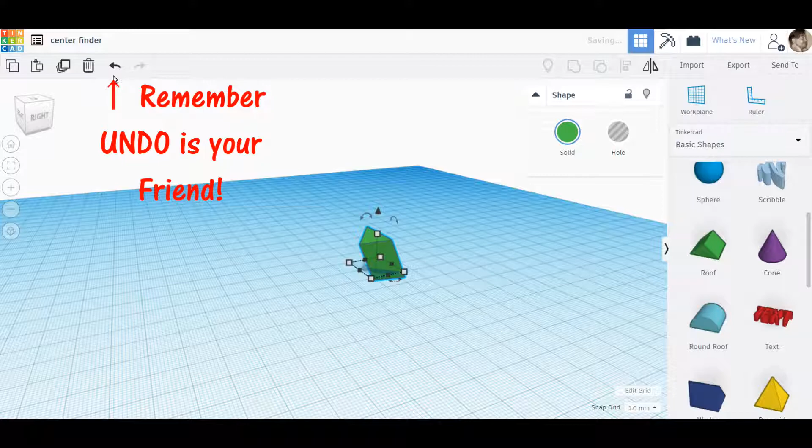Okay, in this video I am making a 3D printed center finder. Well, two in fact, but one's just a copy of the other. I'm showing you this basically because it's all 3D printed, there's nothing much to show, but there's a bit of video footage at the end of the printing process.

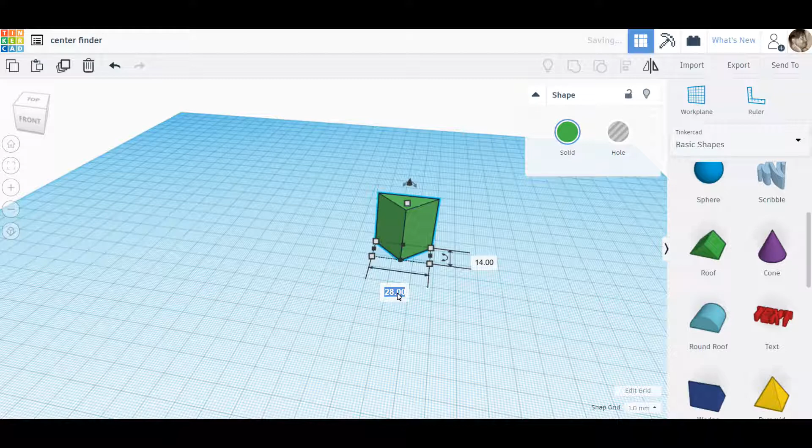I'm just showing you the quick design work that I did, nothing fantastic. I did it in Tinkercad. I have got Fusion 360, but I'm still very, very green with that at the moment.

And it's very much a case of time. So basically, I started off with two triangles, one to cut a hole in the other, and then made a ruler and joined them together. That's the long and short of it.

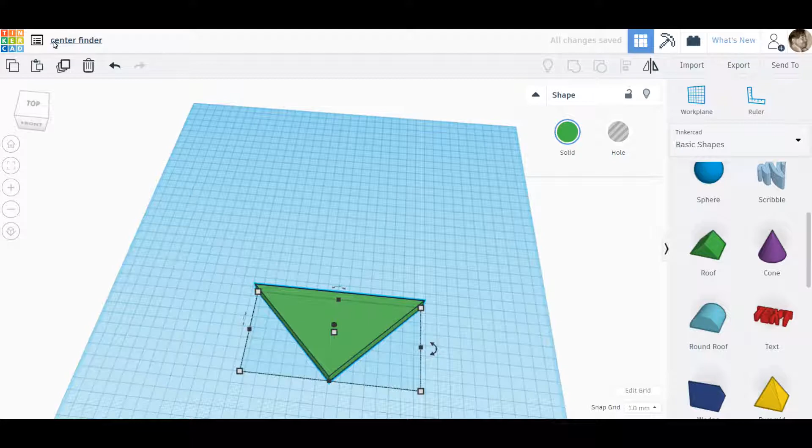And it is dead on accurate - as accurate as your 3D printer is anyway. I was really pleased with it, and the reason I did this was because...

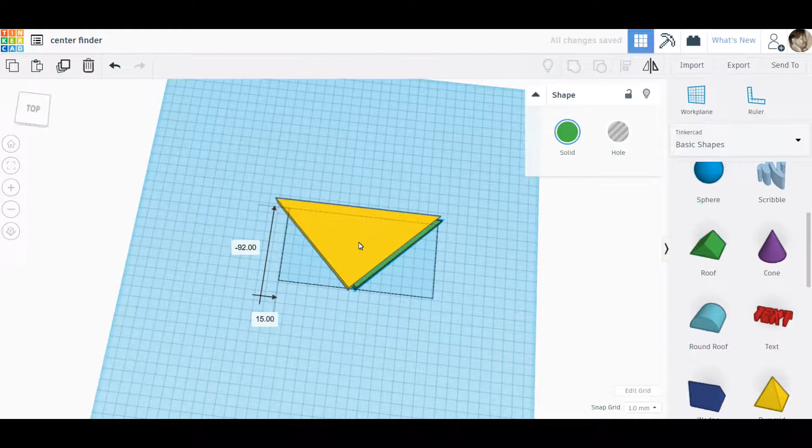I needed to find the centre of a circle basically, and I hadn't got a centre finder at the time. Lo and behold, the day that the print finished, I went to an auction and picked up a complete set of centre, squares and angle finder, made by Moore and Wright, which is a nice bit of gear.

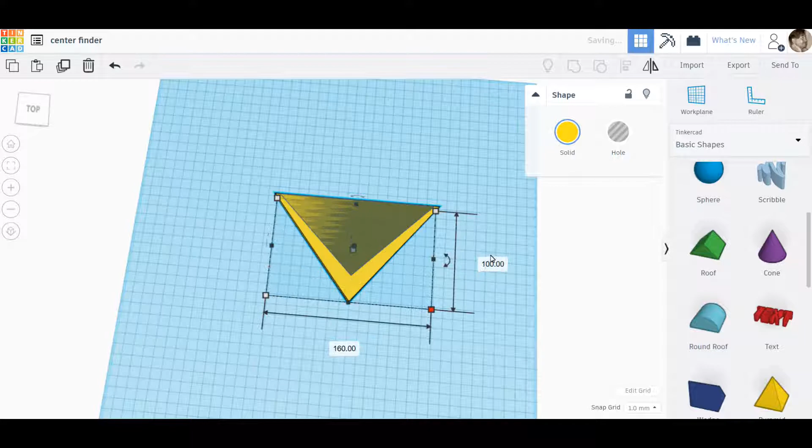But anyway, back to this. So basically, as you can see, I've two triangles, one in the other, one set to hole function, so it'll hollow it out.

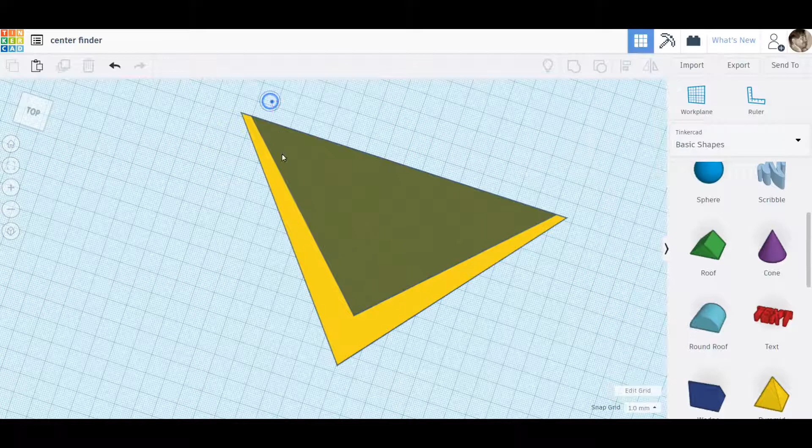And basically I'm just twisting it around, just making sure I'm happy with what it looks like. Going to join them together and it should hollow it out. There we are. So that gives you the first part.

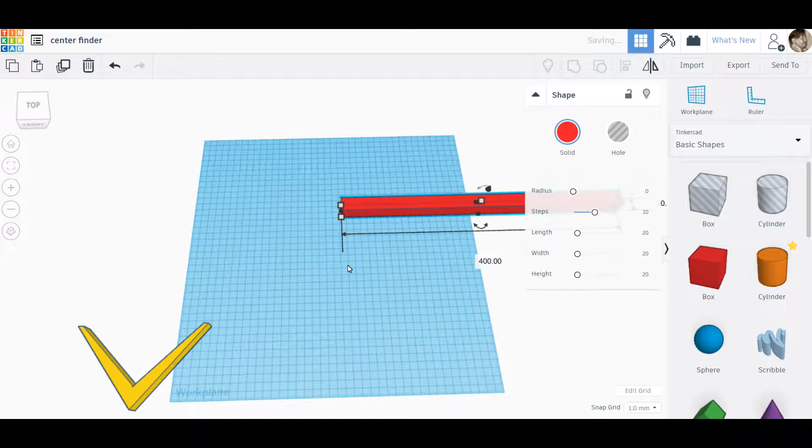So the next bit is the ruler. So start with just a square, lengthen it - I shouldn't have lengthened it the other way - widen it, and flatten it, of course.

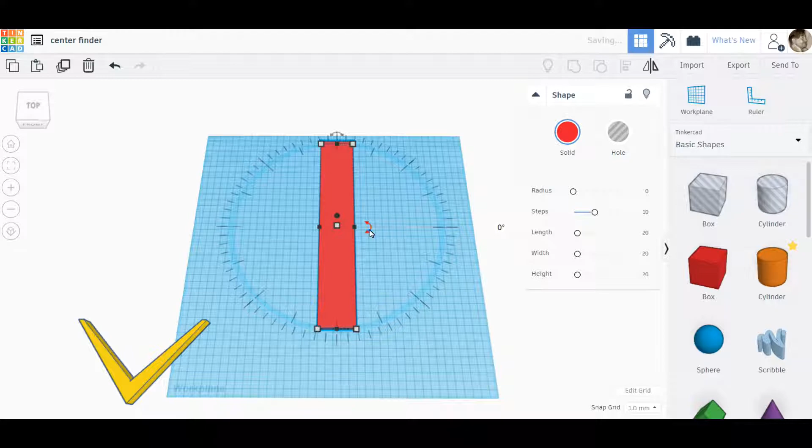I do this twice because I actually put a second one on the taper, as you'll see in a minute. Now in Fusion 360 you could probably round off the upper edges slightly, far easier than you could in Tinkercad.

At one point I did actually put a taper on one edge, but the way that it wanted to be printed, it wasn't really going to make a nice edge, you know, it was better just to leave it square.

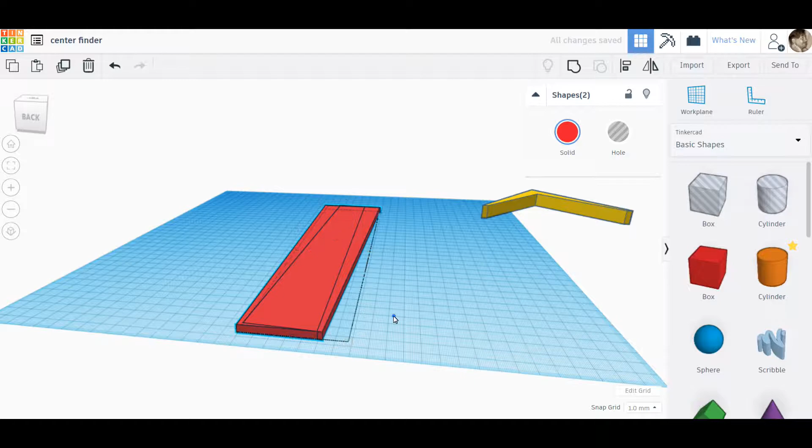So as you can see, the second one I've just slightly angled and I'm just moving it around so there's very little unevenness at the far end where the two overlap. It's just a very slight kink on the corner, which is fine.

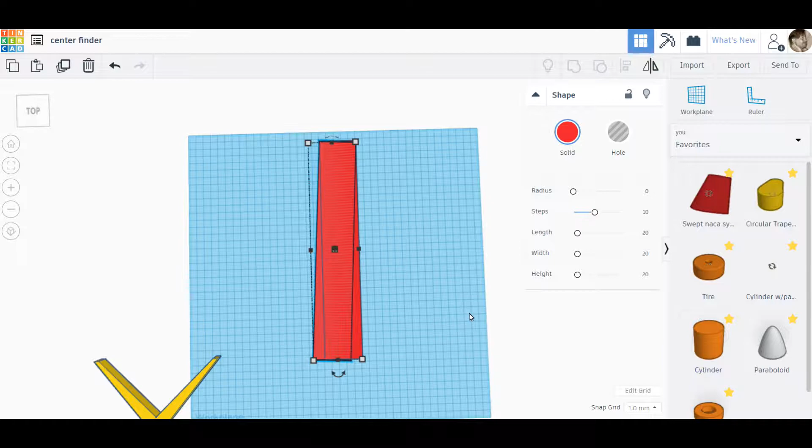Not worried about the bottom end because that's all going to get chopped off anyway. So what I'm going to do now is round off one edge, the edge to the tapered side. You'll see how I do it.

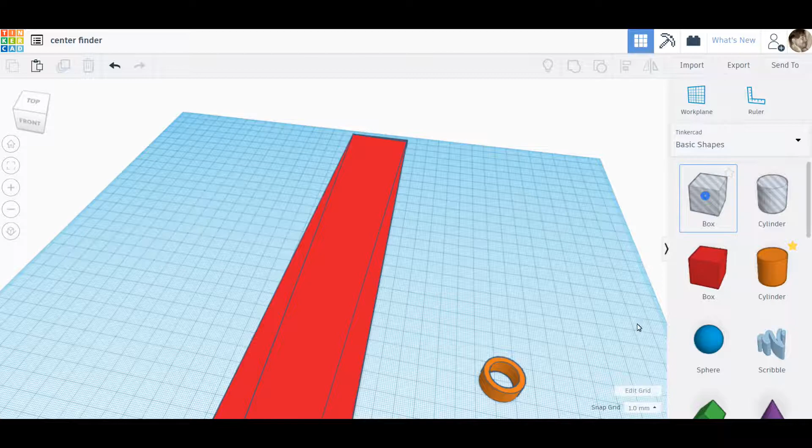What I should have done though is made this a bit thicker - you'll see why later on. But to give me a rounding profile, I'm just going to basically slice it so I've only got a quarter of it left.

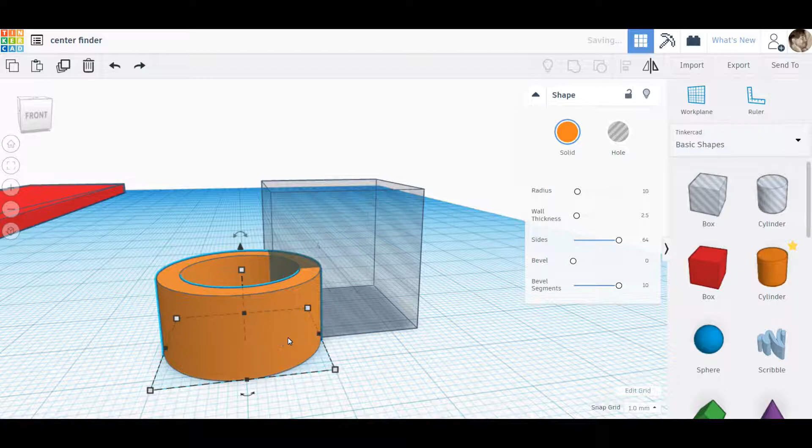One thing to do, remember to increase your number of segments on your circles, which makes them far smoother, as you see there. So I'm squaring it up so I've got a defined measurement there. Makes life a lot easier when you want to divide it in half. I know it's 20 wide, so 2 boxes.

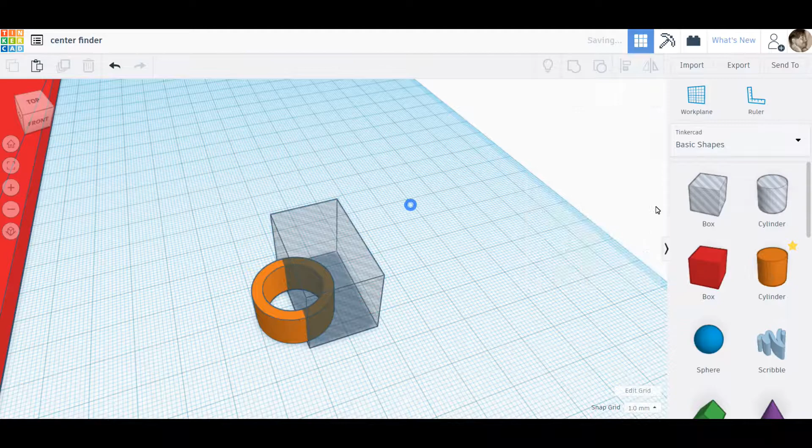So that's half done. Second box, and again I'm just going to move the circle up to give me a nice easy point of reference. There we go, that's that. Join them together - that gives me just a quarter of a circle.

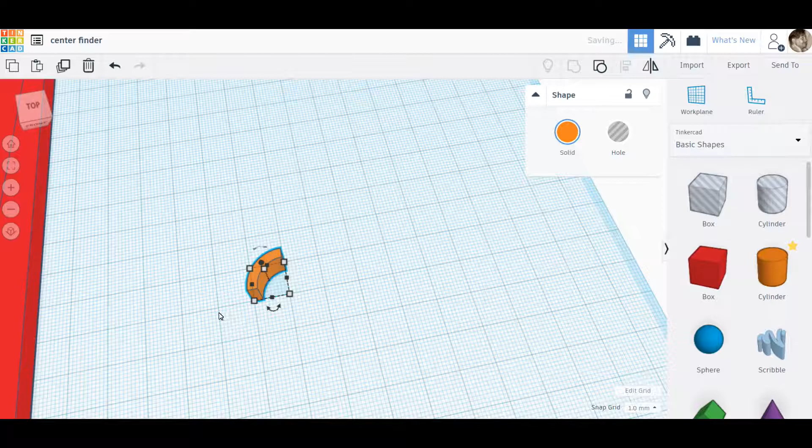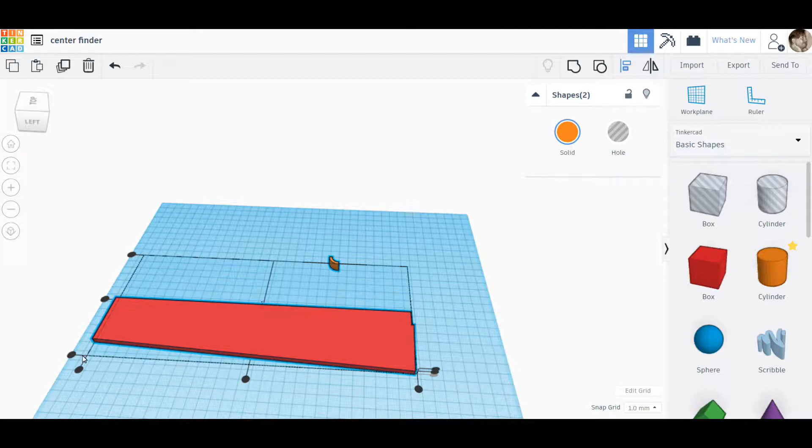So, right, just bringing this up - to be fair, I don't quite know why I did this. Let's zoom in a bit, and you can see that just slight on that edge, there's a slight kink upwards where the angle profile takes over.

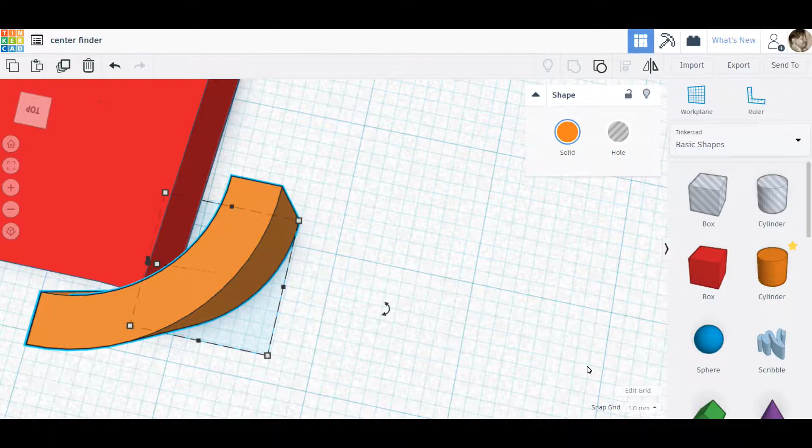So it's just a matter of just putting this in, and then what I'm going to do is use the hole function, and that's why I should have made it a bit thicker, because it would have covered that profile, but it's easily got round.

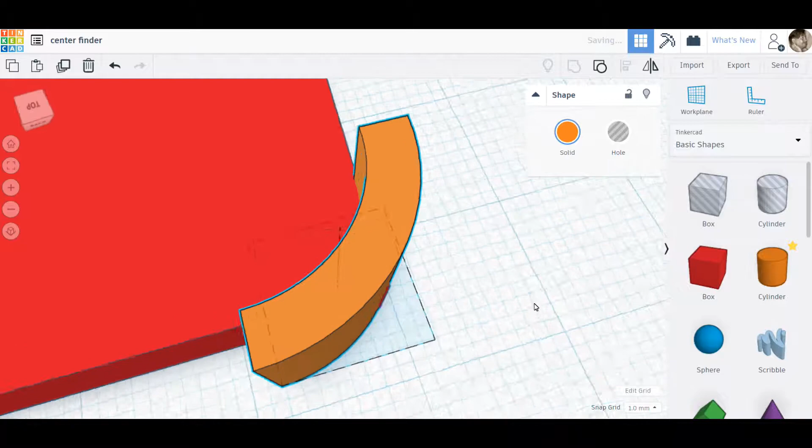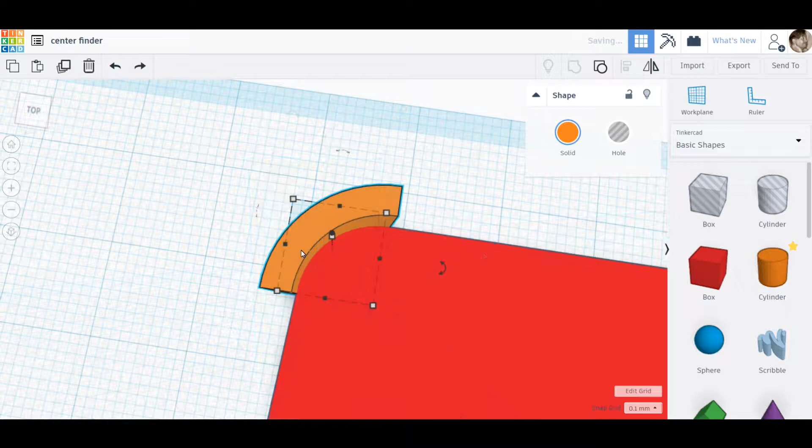So basically I'm just trying to move these into a nice tight position, and I'll show you a better example in a second, because I zoom in so you can see on the edges - you can just see a little line on the edge. There we are, you can just see the line.

I just want there to be just a little bit of it left, so that's a bit tight. There we are. So we want just a little bit of line, and that should smooth in nicely when you do that.

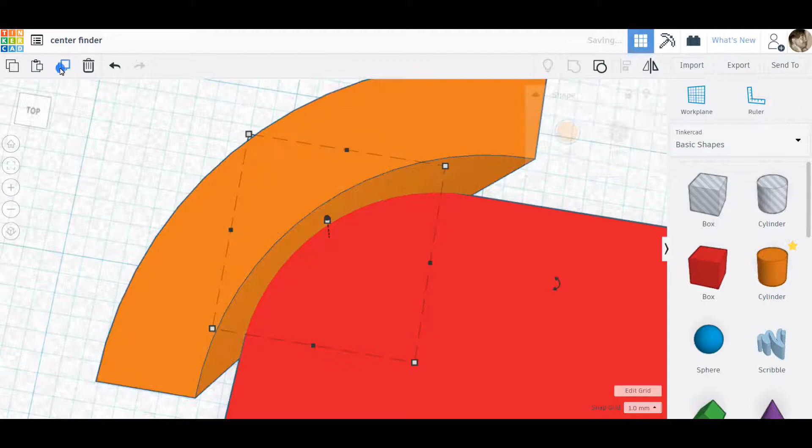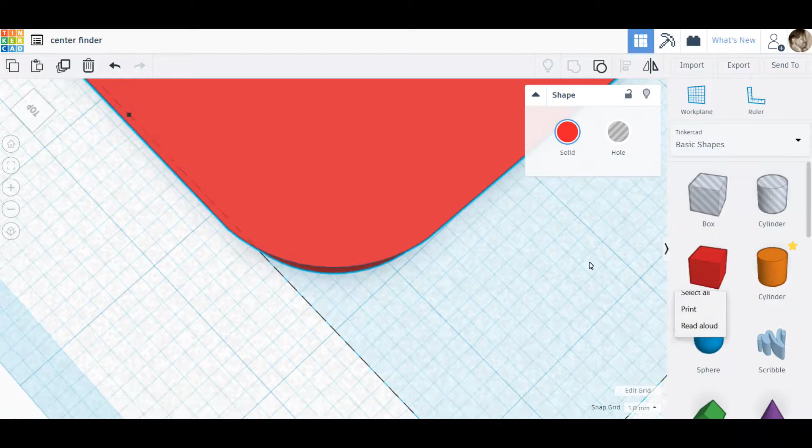Now I've just duplicated that, just moving it out to cover that extra corner that's poking out the back. Put on hole function, join it all together. Bob's your uncle - nice smooth corner just taking off. So really not a lot to it.

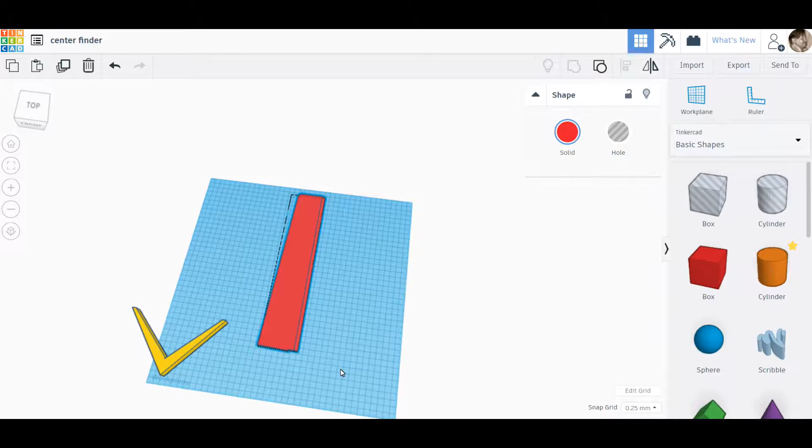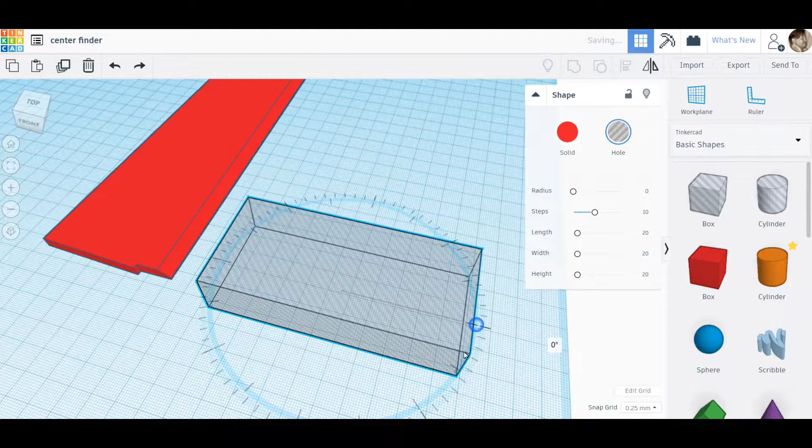So, nice big box to cover it. Put my angle at about 45, drag it over. Don't need to go right to the corner, because I can tuck it into the triangle, there's enough meat there. I'll join the two together when I'm ready.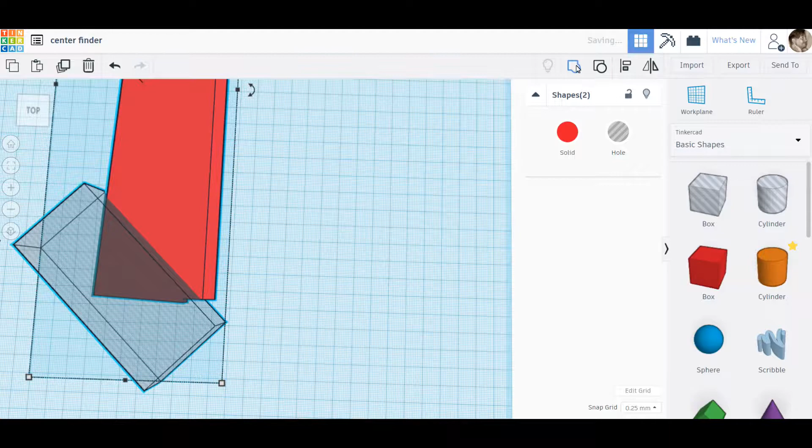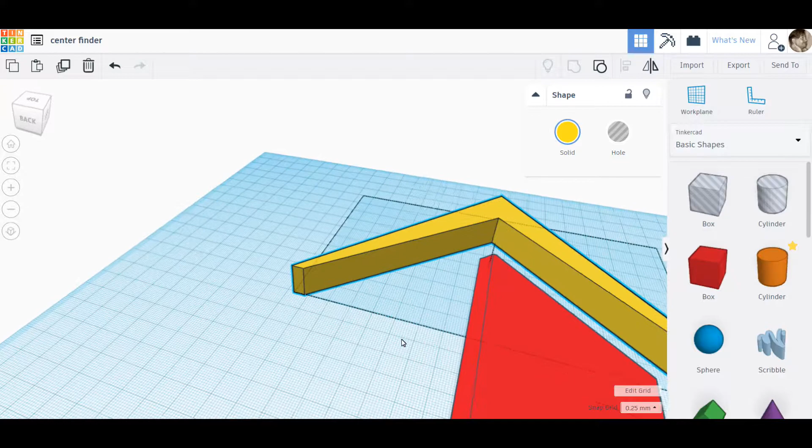Right, let's lop that off. Now drag that over. You could center it with a ruler, but it's easy enough to do by eye. Remember, all the adjustments at the moment are set to millimeter, so you can easily gauge whether you're in or out by a millimeter just by looking.

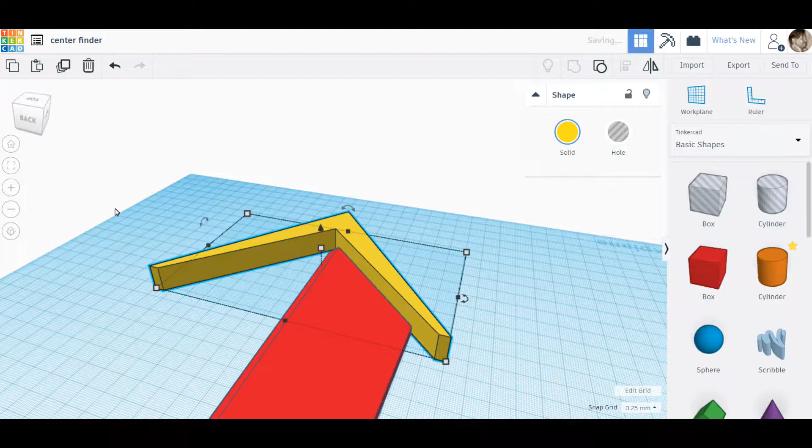So just lining it up. I keep clicking on my center view, which is the second button down on the left there. It will center on the object you're clicked on. If you're not clicked on an object, it will center on the whole mass. So there, just lining that up with that edge.

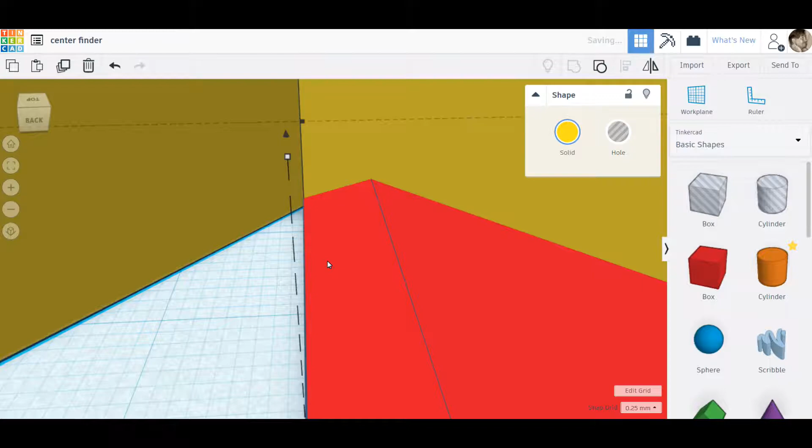Just spin round, make sure you're on there. Because you're set to 1mm segments, you pretty much can do that by eye. If it was any less than that, you'd start to worry whether you were dead on, but with 1mm you should be able to get it nice and easy.

And there we are, that's the basic shape of it. It's all looking nice.

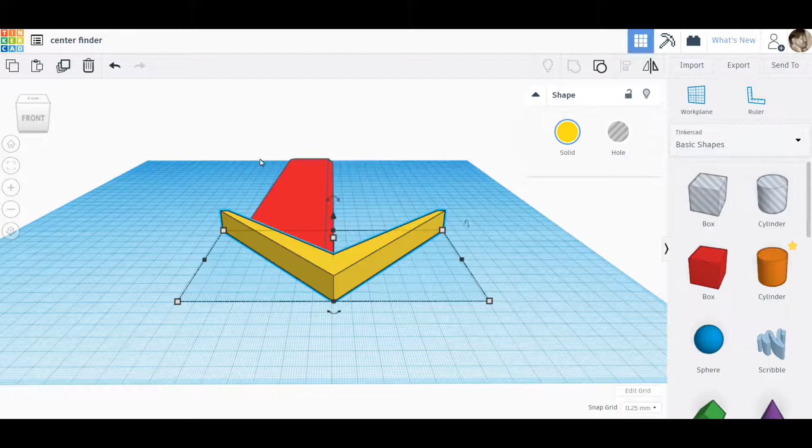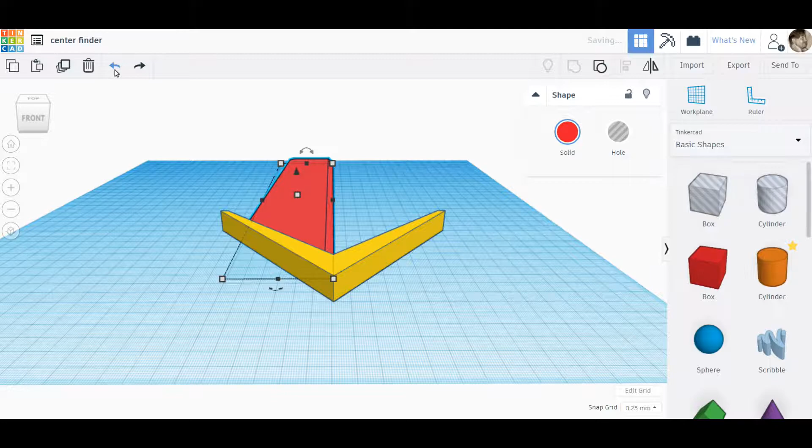Don't know what I'm prattling around with there. Don't quite know what I'm doing actually.

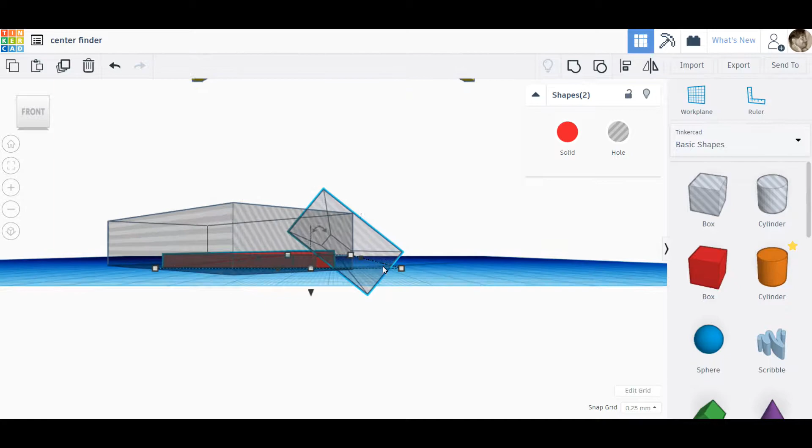Oh, that's right, it's because I'd put a tapered edge on and I wasn't happy with that tapered edge. Because when I come to 3D print it, it could cause a problem. And realistically, as much as it will print okay, it's not worth the aggro, because it's not going to cause a problem being dead square.

So I basically just deleted it in the end. I just wasn't happy with it. Still just can't make up my mind what I'm doing, but I know in the end that's it. I just decided to delete it, keep it square.

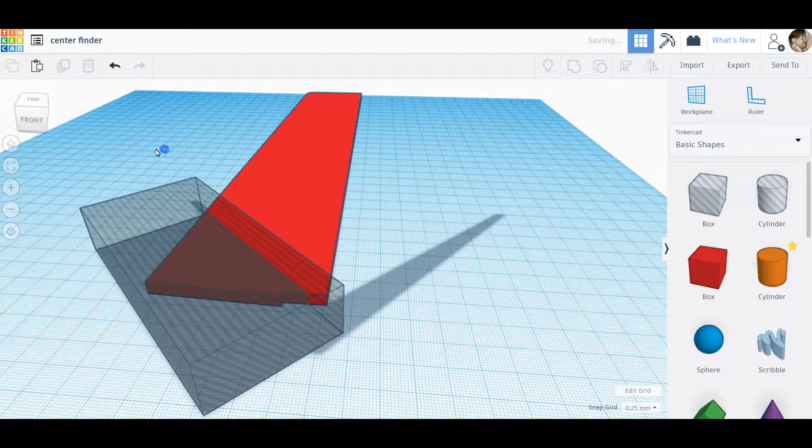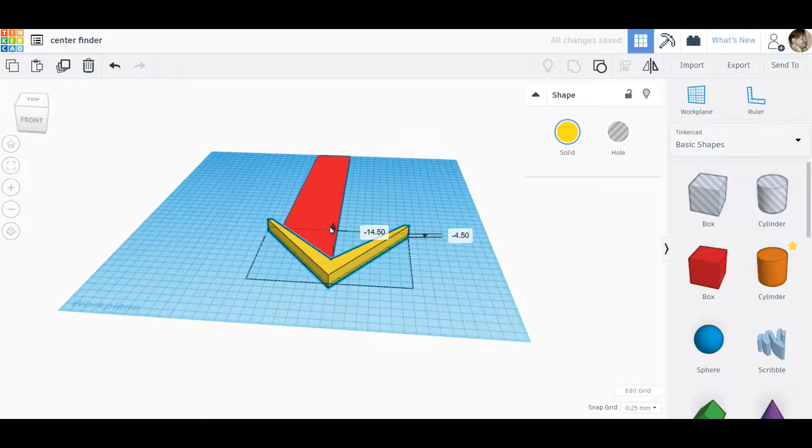It's easy enough, when you're doing something like that, to just shift something up in the air out of the way to save realigning things. I've spoken to a few people and they have this habit of just dragging them off to one side.

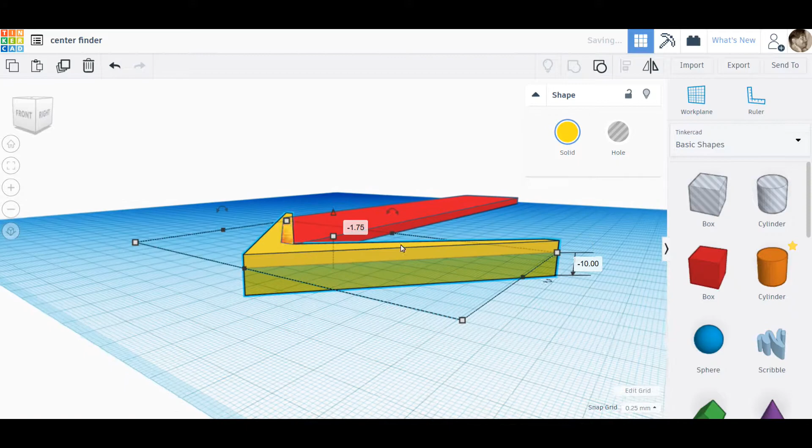Now I just need to get this level. Now, strangely enough, if you wanted a left or right hand version of these, it'd be very easy to take my design and just flip the ruler over to the other side.

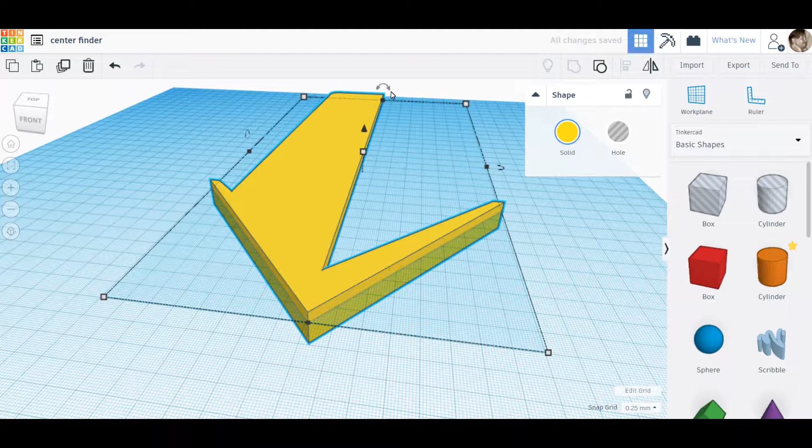So, for instance, this is designed for right-handed use, because it would be used just as it is now. But equally, if you wanted a left-handed version, so you'd be scribing with your left hand, you could easily just take the two parts apart and drop the triangle down on the other side.

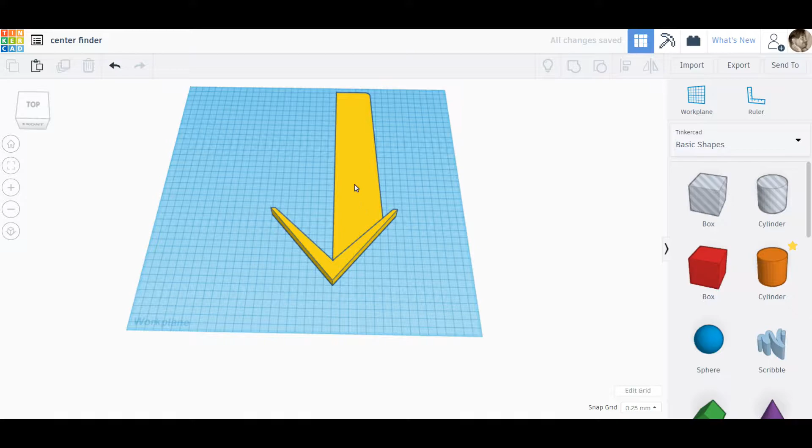And you could make a left-handed one. I mean, you could put the triangle part in the middle, so you could use it either way, but it would make it a bitch to print because you've got no long flat surface. At the moment, it's easy to print on the bed.

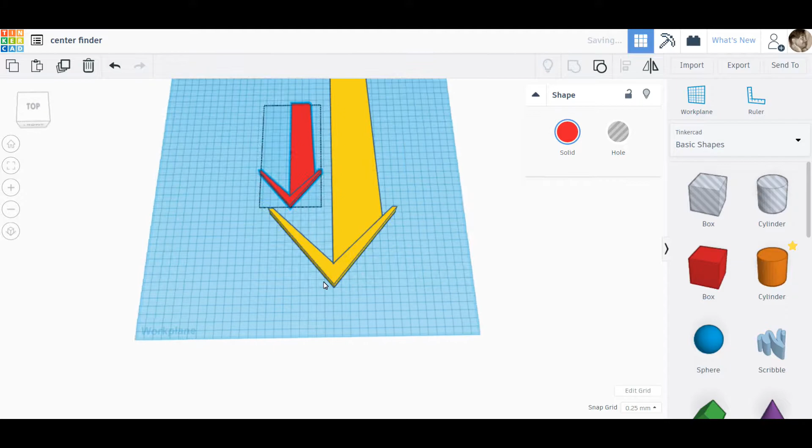There you go. Basically, I've just duplicated it and shrunk it. Now I've got two, a smaller one and a larger one. Like I was saying, you could move the triangle part halfway between the two sides, so you could use it left or right-handed.

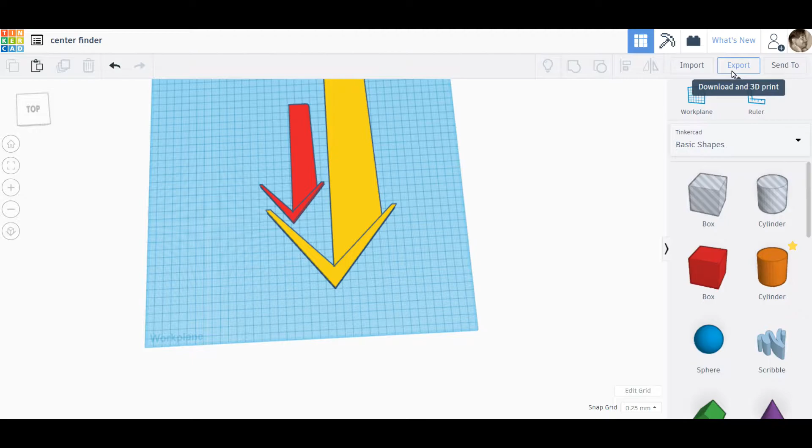But the long blade would have to be printed with support, and it would be easier just to do it like this. So if you're left-handed, take it apart, drop the arrow down or flip the side over.

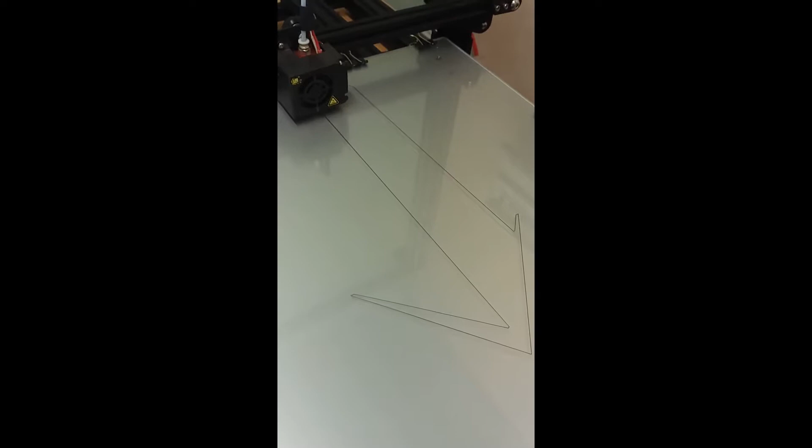So here it is, the start of the print. Nothing exciting really. I'm running a Creality CR-10 S4, so I've got quite a large print area.

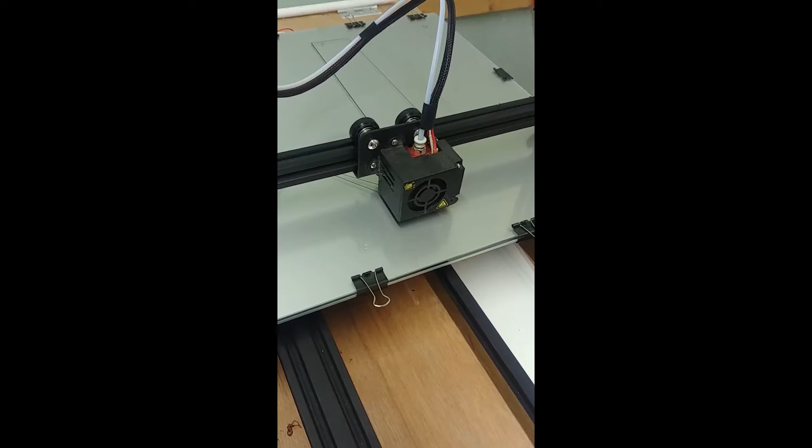You may find that anybody wanting to print this might have to shrink that larger ruler down. I think off the top of my head it was 325 long overall. Can't quite remember, but I'm sure it was over 300 long.

This is a bit later on in the print. I have used it, and it really is quite an accurate piece of plastic basically.